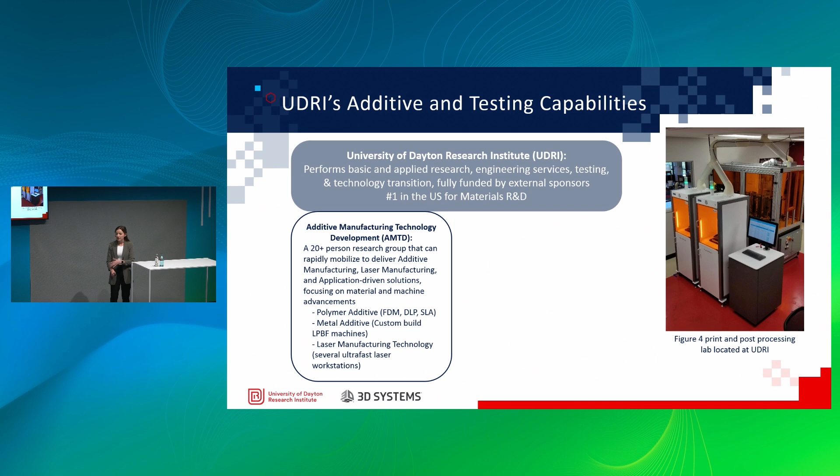We also have our own ultra-fast laser technology team, so we can really attack applications that our customers bring to us very quickly. Within UDRI as a whole, we also have a variety of testing capabilities in-house, so that makes programs like this happen very quickly, where we can iterate pretty cheaply and quickly on materials as we develop them with third-party partners like 3D Systems for our aerospace customers.

This includes a variety of mechanical testing and ASTM standard testing, and one I'd like to highlight specifically today is our Flame Science Lab, which has 30 years of experience within the flammability realm geared toward aerospace applications.

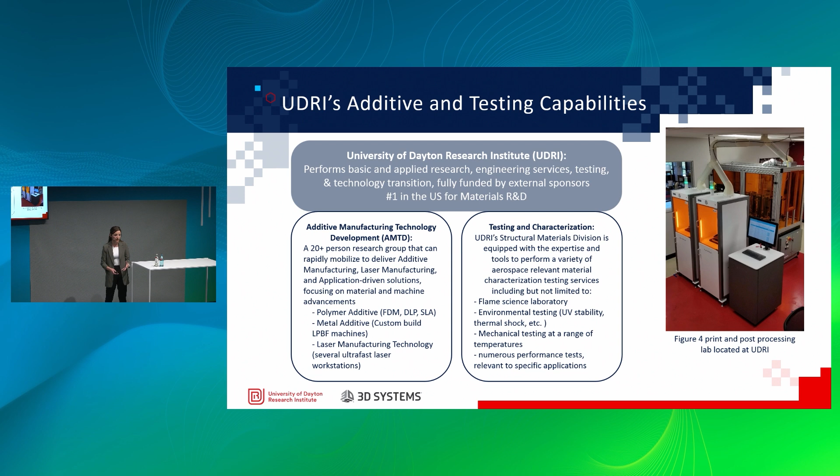As an overview of this program, we researched this material for about 1.5 years with 3D Systems, partnering on a program that was funded through America Makes.

The overall objective of this program was to identify a material that meets modern flammability specifications, but is also rigid and robust enough to withstand installation and use for interior cockpit components.

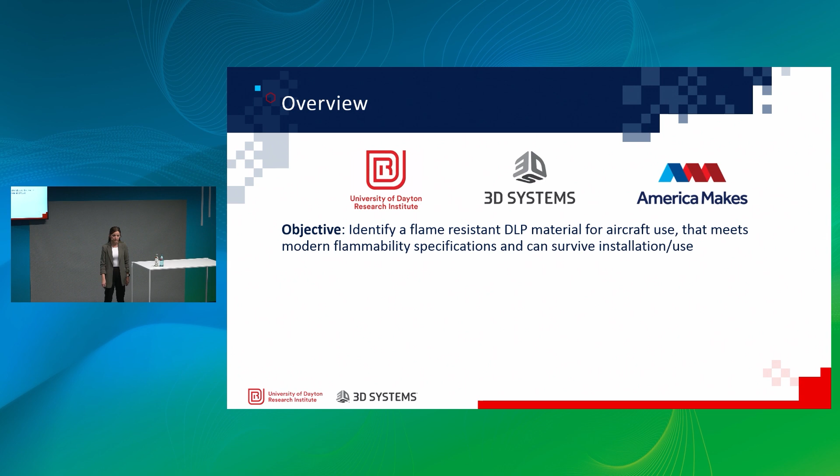We achieved this in three main steps. First, work with our aerospace customers who are identifying these as needed parts, to identify the modern flammability specifications laid out by the FAA, and also identify what kind of material properties we're looking for in these rigid components. Then take those requirements and hand them over to 3D Systems so their material experts can develop materials for us to evaluate.

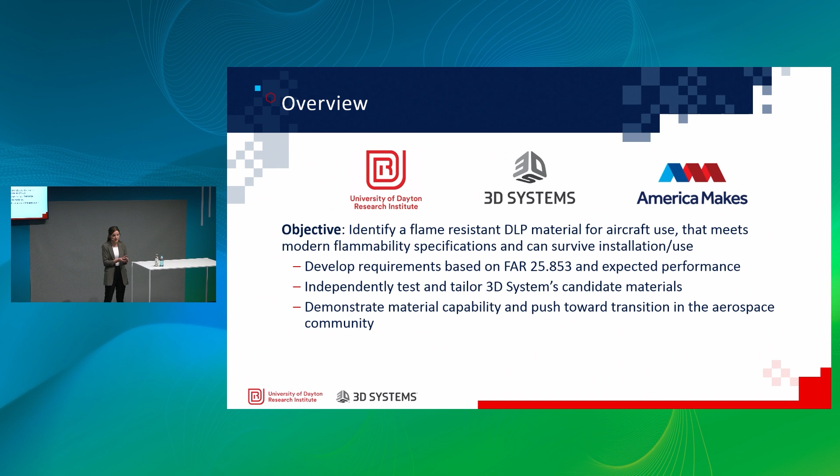And then finally, when we've completed our testing, we move those materials back to our customers that stated their need, and work toward implementation and transition into aerospace parts.

For a few years, there's been a need in the aerospace community for a material that can survive installation and use within the aircraft, specifically with knobs and small panels or switches that you see riddled throughout aging aircraft that is still flying. These small parts might be breaking or becoming brittle with decades of UV exposure, heat exposure, and people handling them roughly, and there's no current pathway for replacing these parts in the market today. It's usually cost or time that inhibits the replacement of these parts successfully.

So this is really a key application that additive can make an impact on. However, in the past, UDRI, in conjunction with 3D Systems and our aerospace partners, identified this material gap that exists.

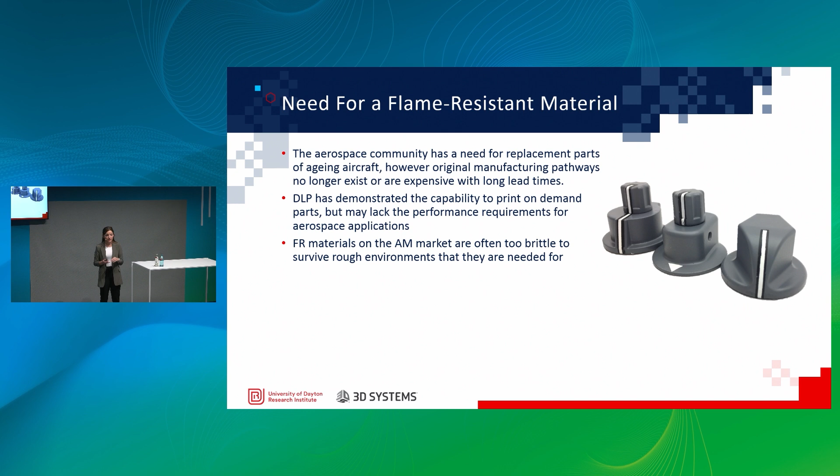First, there are plenty of FR materials that exist on the DLP market. However, many of them only pass modern flammability requirements at very large thicknesses, or they're very brittle—we're talking around 2 to 3% elongation, which does not survive even the main installation of small parts like this. And any part that is tough enough for installation does not meet modern flammability requirements.

Having identified this kind of gap that exists in the market, we partnered with 3D Systems to tackle this specific hurdle so we can start manufacturing reliable parts for aerospace sustainment.

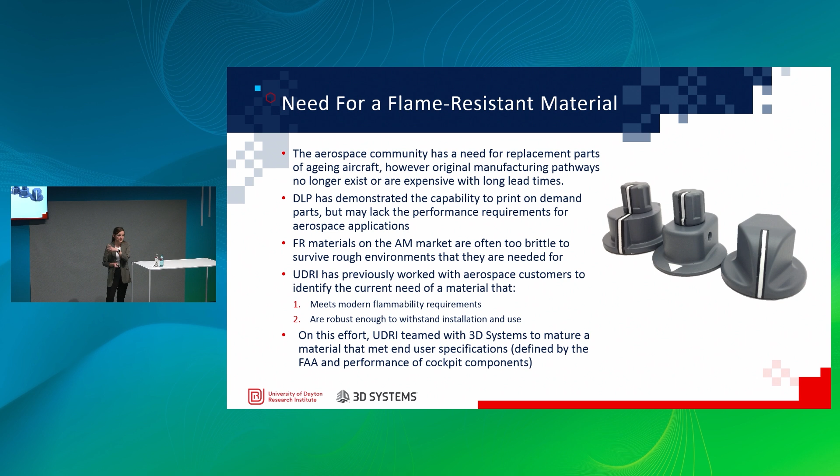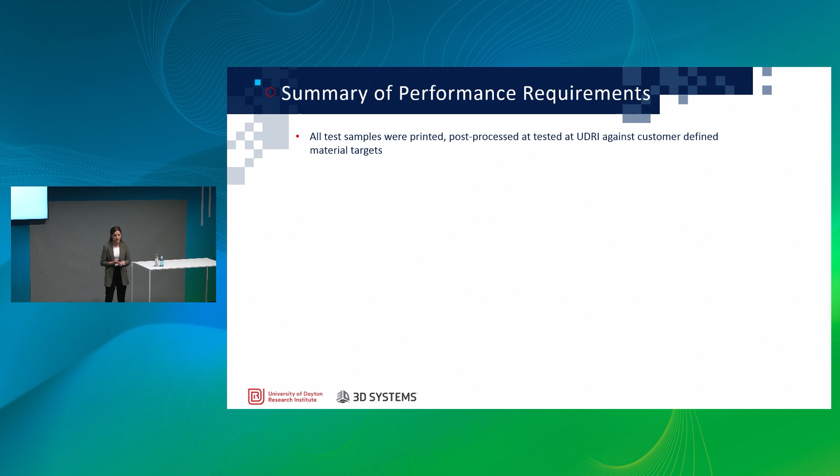Throughout the program, we evaluated about 7 material candidates from 3D Systems, all manufactured at 3D and then given to UDRI to independently test, evaluate, print, and post-process on our own as a third-party evaluation. Here's a very overwhelming but comprehensive summary of the testing that we performed.

Again, all of these tests that we did were very specific to this application. There are more tests that have been done for the material itself on the 3D Systems side, but I want to call out these two main material requirements that we were looking at.

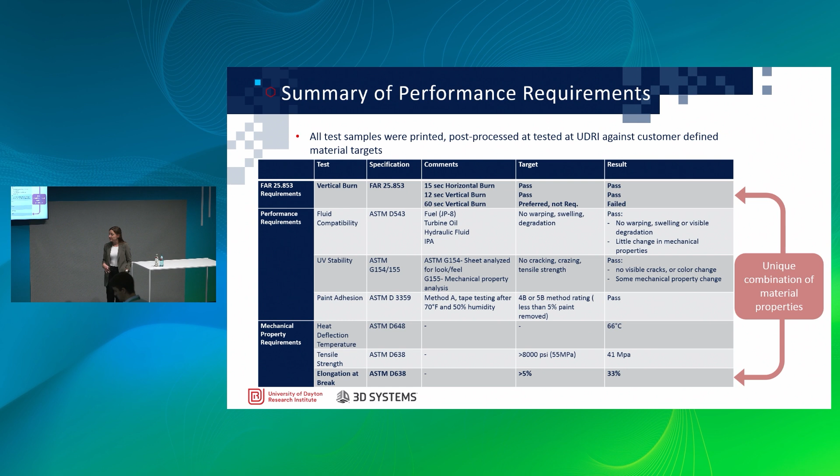These are the two material requirements that currently did not exist, but now we are seeing both a passing of modern flammability requirements and also a high elongation of 33%, compared to the 2 or 3% that currently exists in other materials on the market. This is a very unique combination of material properties that makes this key for these applications.

So to dive a little deeper into what these flammability specifications are, because I think this has larger implications onto the DLP and SLA part replacement field as a whole.

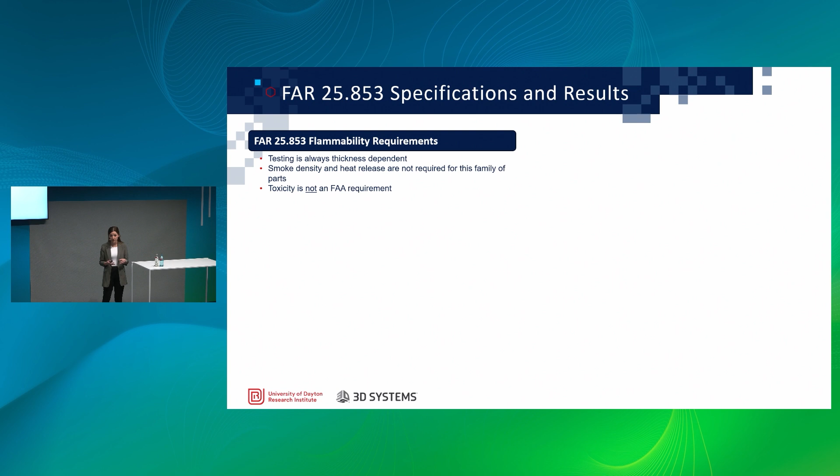A lot of people refer to FAA flame, smoke, and toxicity testing as one giant umbrella of material properties that we need to pass. However, the material properties needed are often dependent on two major things: first, the size of the part you're trying to replace, and where that part is within the aircraft.

For example, larger interior panels or structural components require the very difficult to pass 60-second vertical burn test, and you often also have to pass stringent smoke density, heat release, or toxicity testing as well. However, when we're looking at small cockpit components, anything printed on the figure 4 size of materials that we're replacing, we really only rely on the 15-second horizontal ignition test, or sometimes even the more stringent 12-second vertical burn test. So what's really important within the aerospace realm is to clearly identify what part you're trying to go after and what specific flammability requirements are actually required for that test.

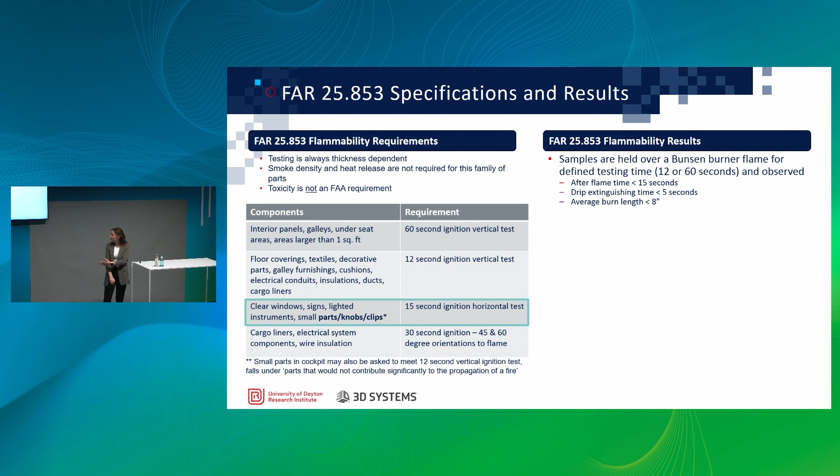So we can clearly identify that here. And as a result, after identifying what tests we're actually going after, we can reliably test that for our materials. We did this, again, all independently within UDRI's Flame Science Lab. With the material candidate from 3D Systems, we are reliably passing the 12-second vertical burn test at 2 millimeter thicknesses, which is very adaptable for the small materials and parts that we are actually going after. So this tough FR V0 material that's newly released by 3D Systems is passable on modern flammability specifications for a variety of figure 4 size parts.

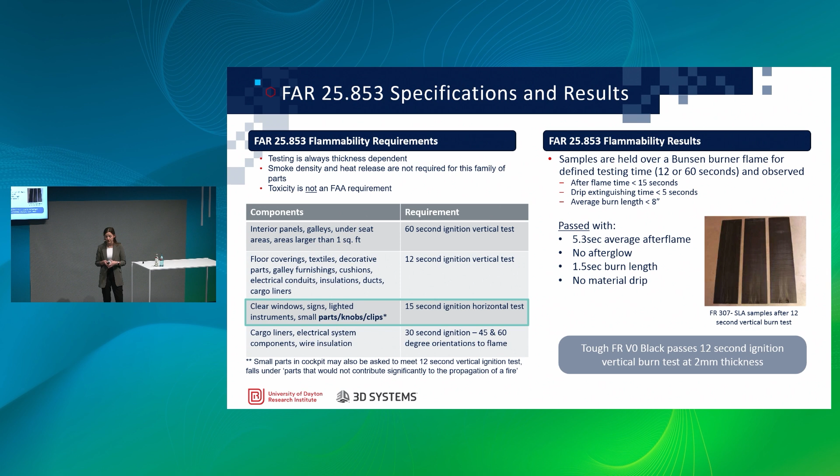In addition to just flammability and elongation and toughness, we also had a variety of other material and performance properties that our customers wanted us to look at. First is UV exposure. To simulate the kind of cockpit environment, we expose these materials to UV light through window glass for 600 hours of accelerated weathering and saw no major cracking, crazing, or discoloration that you would usually see in major UV degradation.

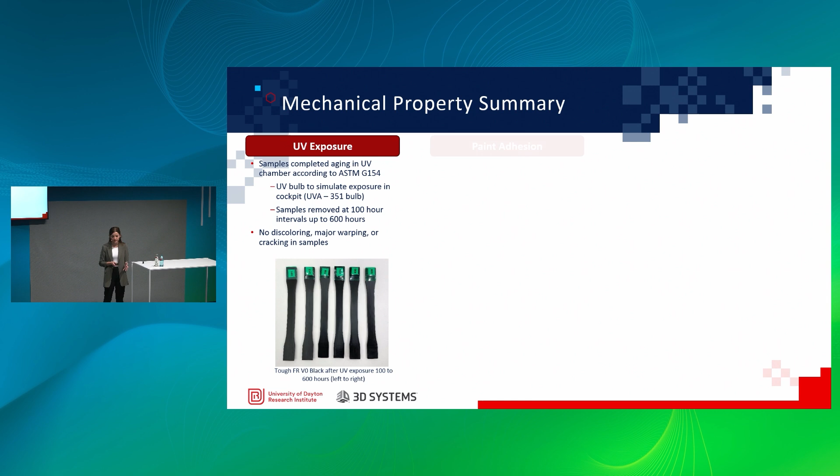We also evaluated paint adhesion. For many of these small knobs that are going in the cockpit, we had to meet a very specific paint requirement, and we wanted to make sure that wasn't going to rub off or get nicked and start chipping off, and so we were able to pass paint adhesion tests very well with this material.

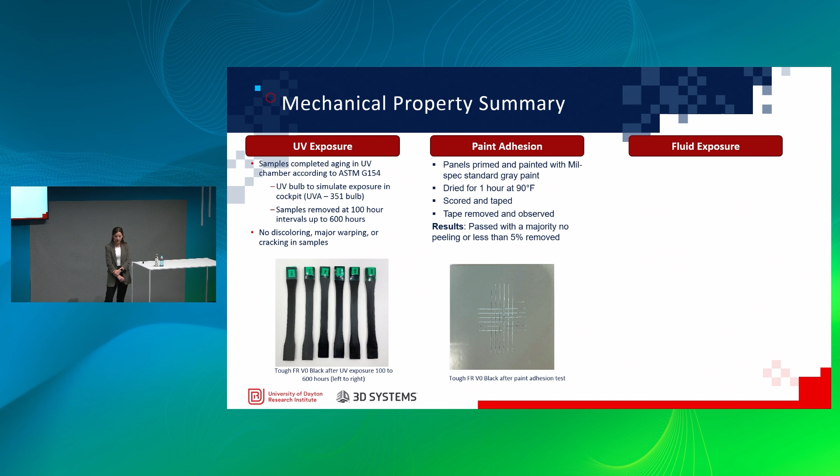And then finally, we looked at fluid immersion of tensile bars in various cleaning fluids for figure 4 parts like IPA, but also hydraulic fluids, turbine oils, etc., of what you would actually see in an aerospace market, with no major change in our tensile or elongation. Any changes we do see, for example with the turbine oil on elongation, that's not really affecting the performance of the part, but it is reported to our aerospace customers so they can know what to expect if there is something that occurs with a fuel or oil spill with these parts.

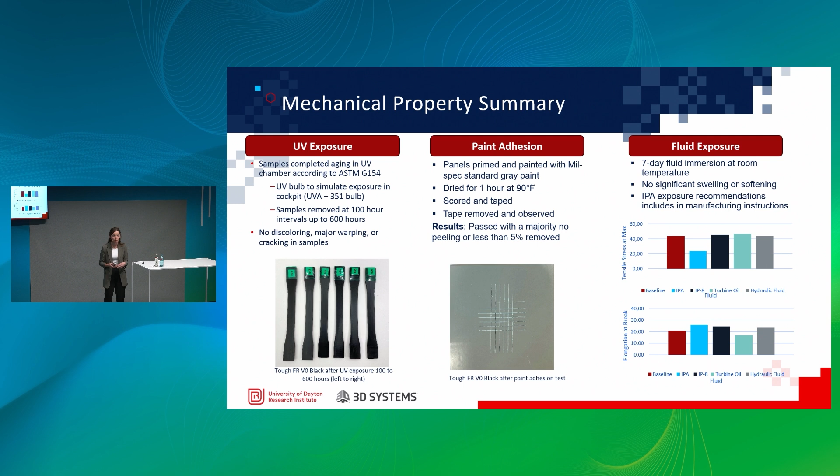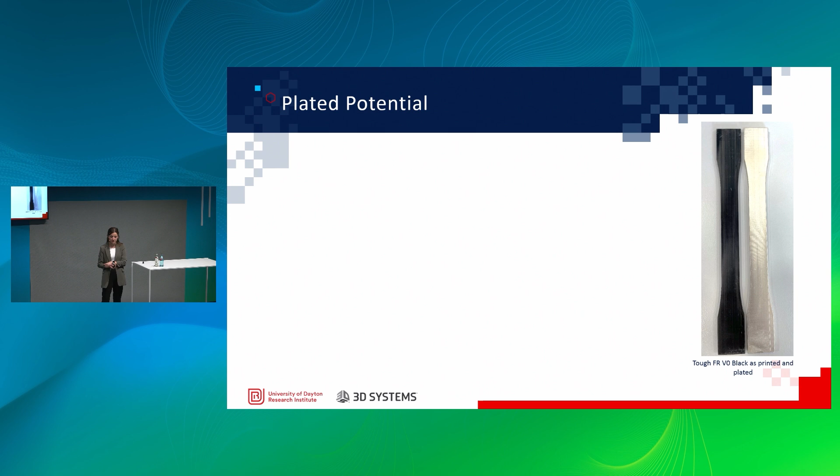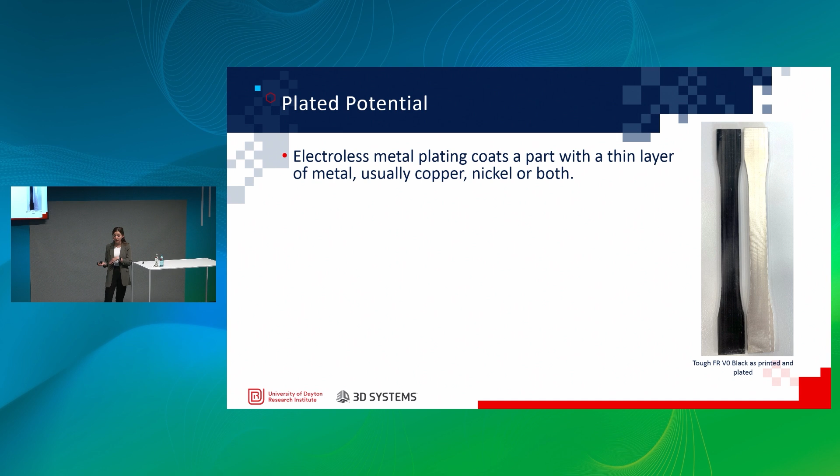So with the success of passing modern flammability requirements and having a tough, new and innovative material on the market, our customers also turned to the potential of electroless plating of these parts. Electroless plating is when you take these plastic parts and add a very thin metallic layer to them. It's commonly seen throughout the automotive, aerospace, and even rail industries to create lightweight parts, but maybe even a higher mechanical characterization because of that addition of metal and also a better look to the part.

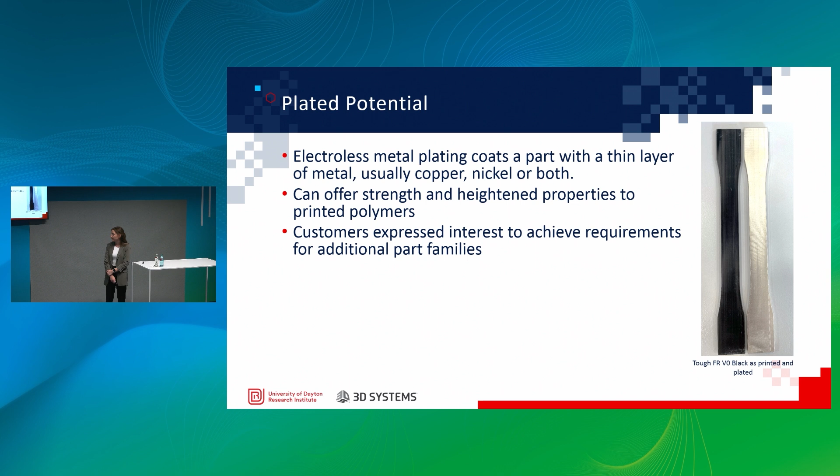So we know that this can add mechanical properties, but what's not really explored is how that affects our flammability requirements. Do we pass higher? Does something catastrophic maybe happen, and for some reason we're not passing our modern flammability requirements anymore? So on this program, we were able to dedicate some resources to find out, again, in partnership with both Repliform and our Flame Science Lab.

As a result, we not only are passing the same 2 millimeter thickness of 12-second vertical burn, but we're passing the much more difficult 60-second vertical burn test with no afterflame, no afterglow, no drip in the material, which really means that we are not adding or propagating the flame anymore, which is what our aerospace customers want to see in any of their materials that they're putting on their aircraft, and specifically with novel materials that they're using for part replacement. Obviously, you can see this is a very interesting passing.

We have a kind of ballooning effect happening to our material. And what's actually happening is that very thin layer of metallic film is containing any spread and pyrolyzing the material within the metal film. But really, that's creating a char, and again, not contributing to any flame or flame event within the cockpit. So it's still considered a pass according to the FAA.

And as expected, we're also passing and increasing our mechanical properties, UV exposure, and lifetime as well with metal plating. So this kind of opens the door to potentially larger parts. Again, metal plating is not required to pass any of these modern flammability requirements for figure 4 size parts, things that are smaller, like these small panels or knobs that we've frequently explored with our aerospace customers.

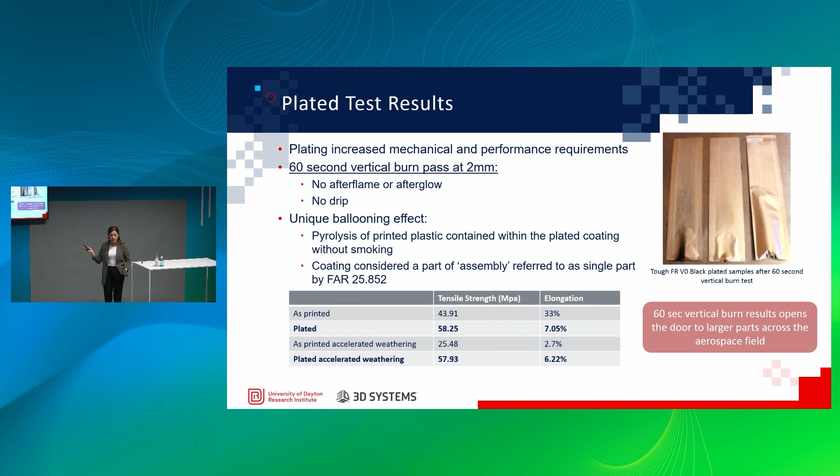But perhaps we might be looking at larger parts, larger panels that might be unlocked on SLA or perhaps even 3D Systems' upcoming PSLA technologies, where we're looking at larger parts. This 60-second vertical burn or toxicity and heat release testing will be required, so this could be an open door into those applications as well.

Towards the end of our program, we looked into a specific case study. A sustainment group at UDRI was brought this problem where they needed rapid part replacements of very small knobs, commonly breaking on aircraft, with no viable way to reproduce them. Many technicians had to go to Home Depot just for a quick fix to get the plane back up in the air, which is not how we want our planes flying.

So obviously our group turned to Ultem 9085, a common aerospace ready material. However, the customer was pretty dissatisfied with the part quality. They printed as expected, but for small parts like this, FDM doesn't give the best surface finish. So the sustainment group turned to different post-processing methods like sanding or coating technologies to get it smooth.

The customer was familiar with DLP parts before and wanted that surface smoothness. We were able to add in this material that we had just confirmed passes modern flammability requirements and is tough enough to survive installation and use, threaded onto metal components. We threw our parts in for evaluation.

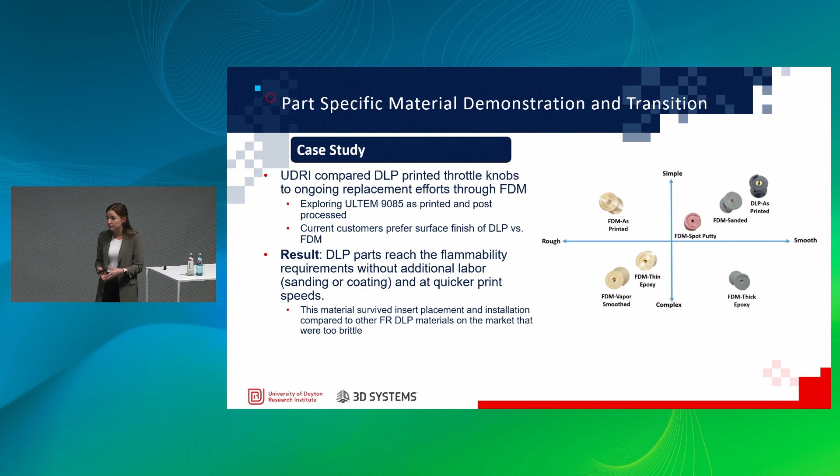This chart was made by the customer themselves, rough to smooth, where we're outperforming any of the FDM with the DLP technology, and complex to simple. This complex to simple includes print time, specifically the manual labor after printing in order to get that desired smoothness.

So this material is not only confidently passing modern flammability requirements and tough, but it's also outperforming some of the common and trusted aerospace ready materials, meaning this material is ready for that next step of qualification and implementation into aerospace customers.

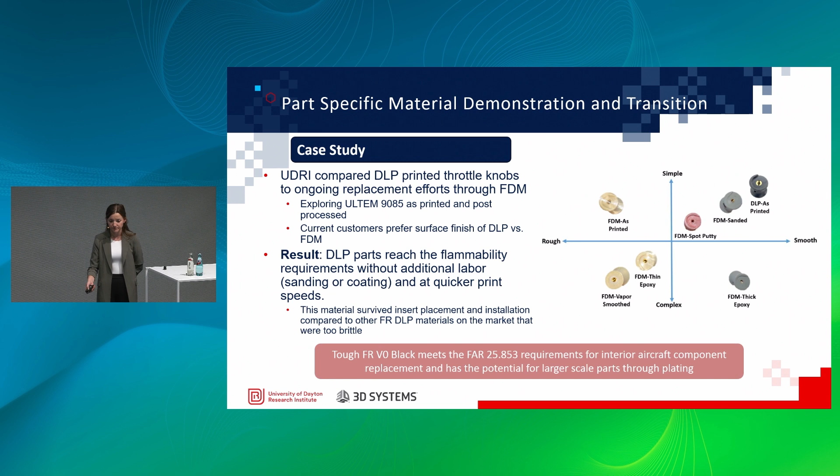As a final summary, this material, the tough FR V0 Black from 3D Systems, meets modern flammability requirements while maintaining high elongation, making it ready for implementation in the aerospace market.

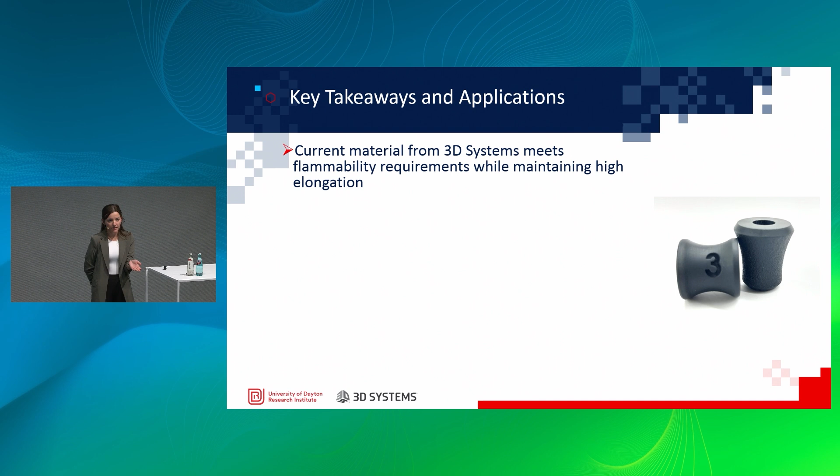We've seen that plating increases the mechanical properties of this material, but we've also proven that we can achieve a higher flammability requirement, making this possible for larger platforms. We are ready for qualification, whether that's advisory circulars in the future or other qualification documents to really establish confidence within the aerospace market that this material can solve their needs of today.

We also demonstrated that we can not only solve the materials by directly replacing knobs or switches or components as given to us, but we can also use the digital tools within 3D Systems software to add in lettering or texturing, so we can cut down on post-processing steps like painting or adding numbers, part of the traditional manufacturing of these parts.

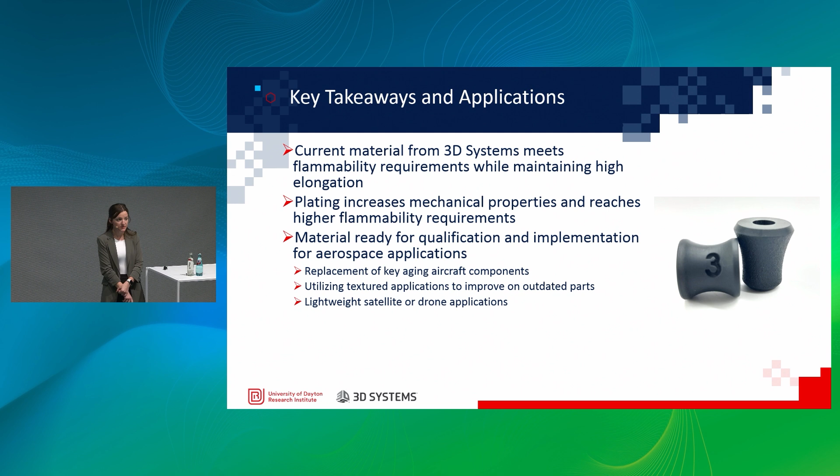We can also look into future applications instead of just sustainment. This unlocks potential applications with drones or satellites, specifically when we start looking into larger parts, which leads to a larger conclusion: not only is this material available and ready currently on the Figure 4 platform by 3D Systems, but another material that shares similar chemistries with this is available on their SLA platform as well.

Throughout this program, I've alluded to using plating to achieve higher flammability requirements for larger parts, and now that's possible on the SLA platforms as well. We can start looking at larger panels or structural components that might be needed for either current aerospace applications or future drone and satellite applications.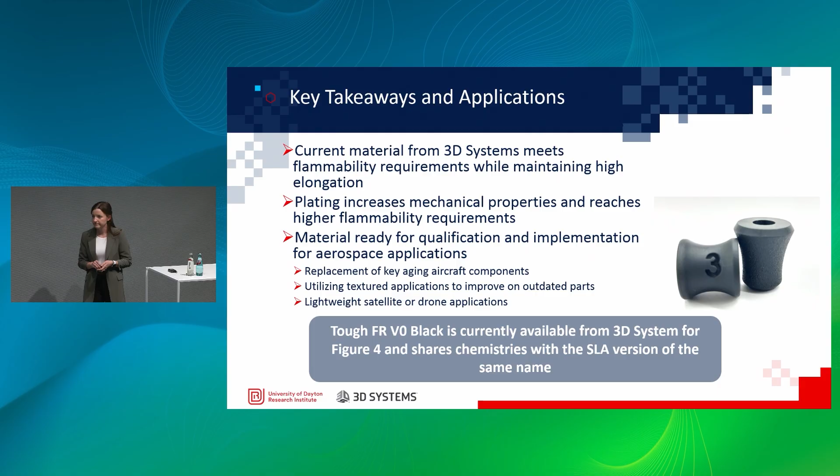As a relatively frequent flyer, I was a little concerned about what happens to the knobs and dials when they break, and I didn't want to ask. And then you said people go to Home Depot, and I definitely didn't want to know. So I'm very glad that you're doing this work to get aircraft back in the sky with the correct controls in place. That's very good.